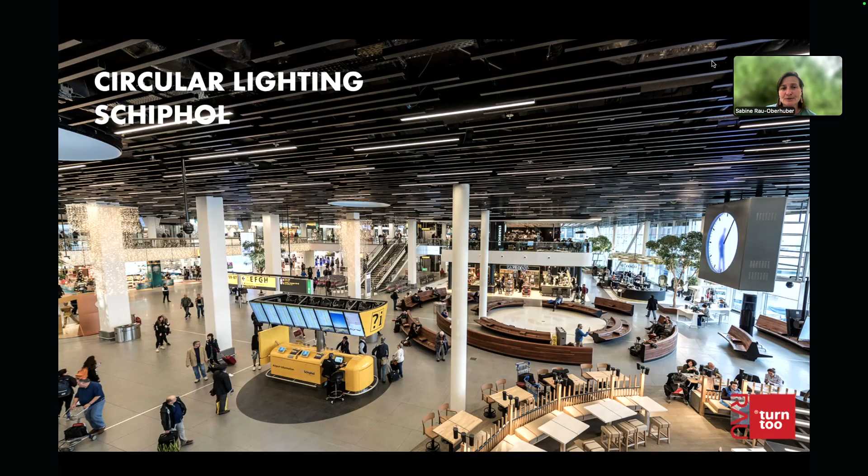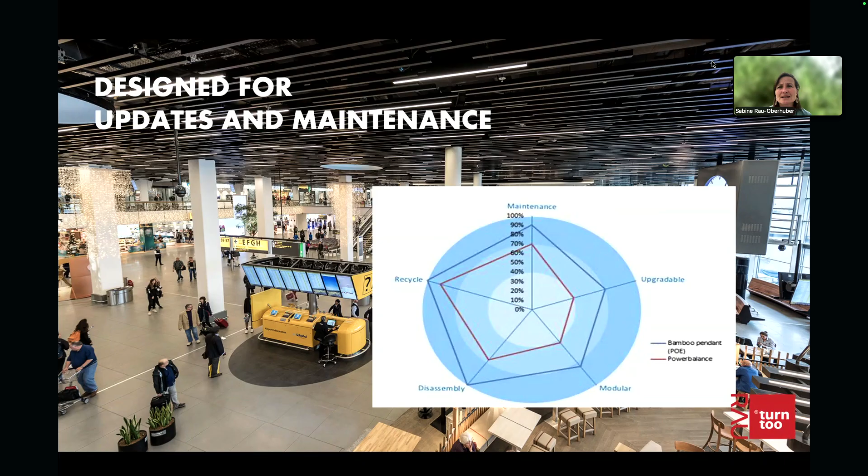So I think this is a very fundamental paradigm shift of how shifting responsibilities also shifts incentives, which we really need in order to get a different system.

The next is definitely circular design. The design principles were already also part of the solution in the circular case.

I want to share with you a couple of examples from our practice at RAU, where we started really thinking of buildings as material banks. So instead of building buildings with— sorry, I'm a little bit nervous, so bear with me.

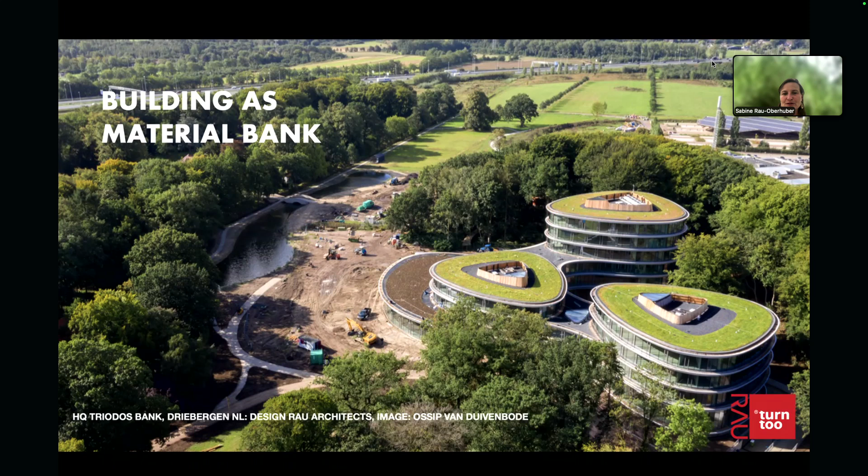So what we did with the Triodos Bank is we conceived of a building which consisted of 5 structural elements which were prefabricated, and in fact the construction of the Triodos Bank was in a way only an assembly. It was designed for reconstruction from the outset.

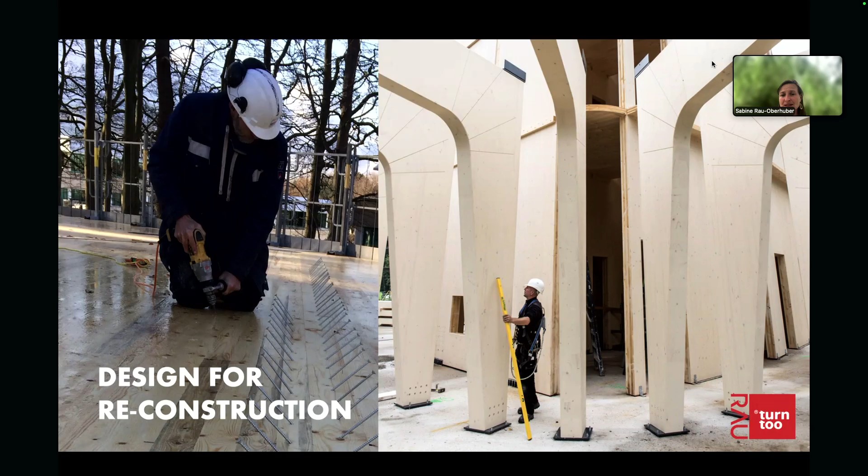And what it meant in the end was that we also could save enormously on construction time. So instead of 18 months, this building was constructed in 13 months.

And this means that circular construction is not only a way of being a more responsible architect, a more responsible citizen, but it's also really bringing economic incentives once we do it right and once we understand how to do it.

And what I think is very important about the project is that already 5 future use cycles have been imagined for this building.

And at the same time, it's not only a building which has won 8 green awards, it has also won the Office Building of the Year award. So circular building does not mean that things have to get dull or only very standardized. Via standardization, you can really create beautiful forms.

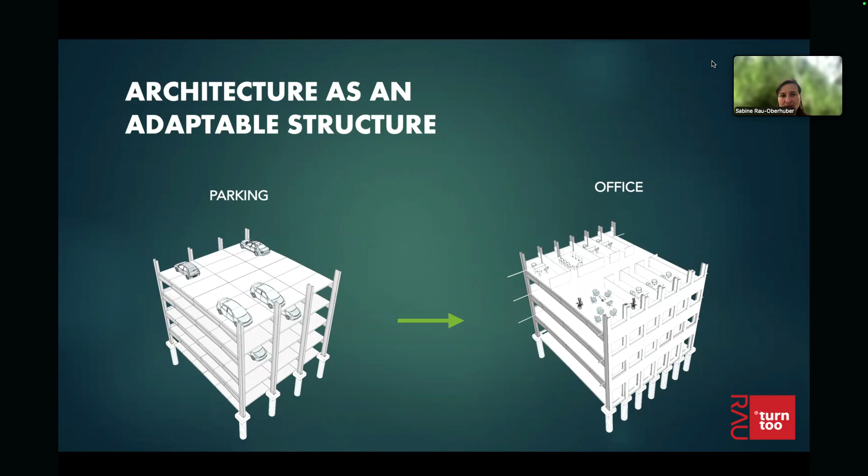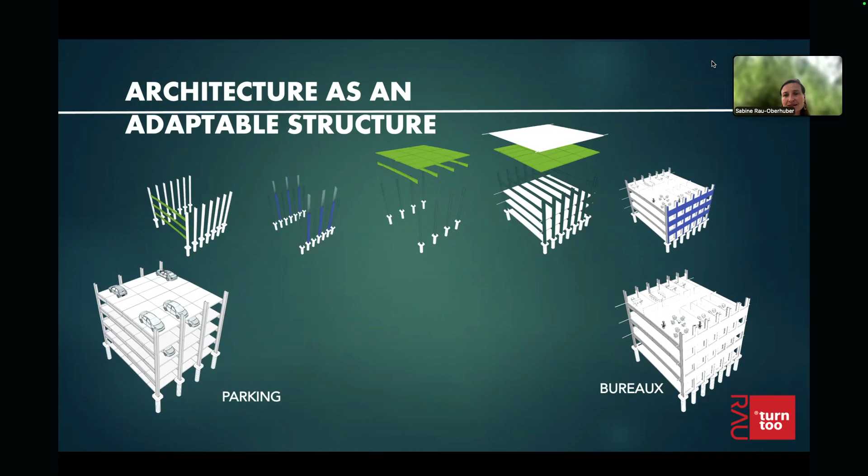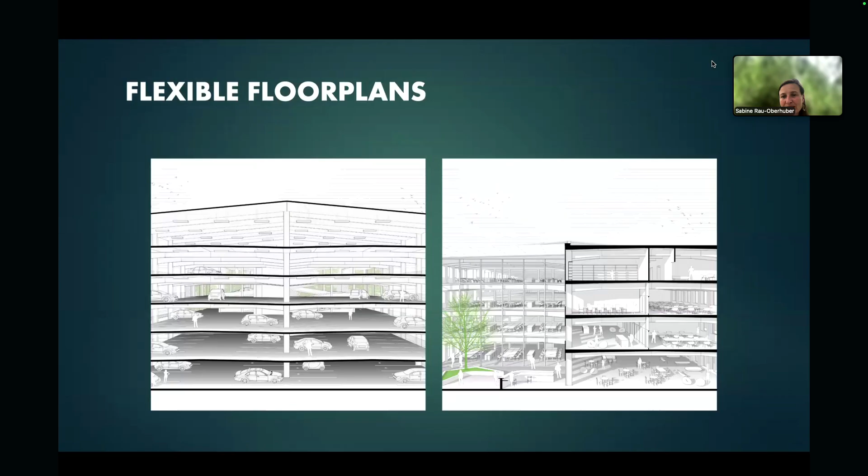So obviously, we had to think about the structural elements. The parking garage has much less beams than an office building would need. So if you adapt this building, you can adapt not only the number of beams used as structural supports, but also the layers and height of the floors. The construction enables a completely different layout of the floor plan. And this is how the structure looks up close.

Another example is the Expo in Osaka, where RAU was commissioned to design the Dutch pavilion. This structure is also designed for disassembly, and as a matter of fact, it has now been disassembled. It's in a warehouse in Osaka, waiting for its reincarnation in a second life on Awaji Island, where it will serve as a community hub on a big sustainability campus for the company Pasona.

What's also very important, and my colleague Kevin will share more about that, is that we need to enable circularity. If we have a circular building, it doesn't mean it is already being deployed circularly, because if you don't know what you have, it's really difficult to reuse it in the future. That's why we coined the phrase: waste is a material without identity.

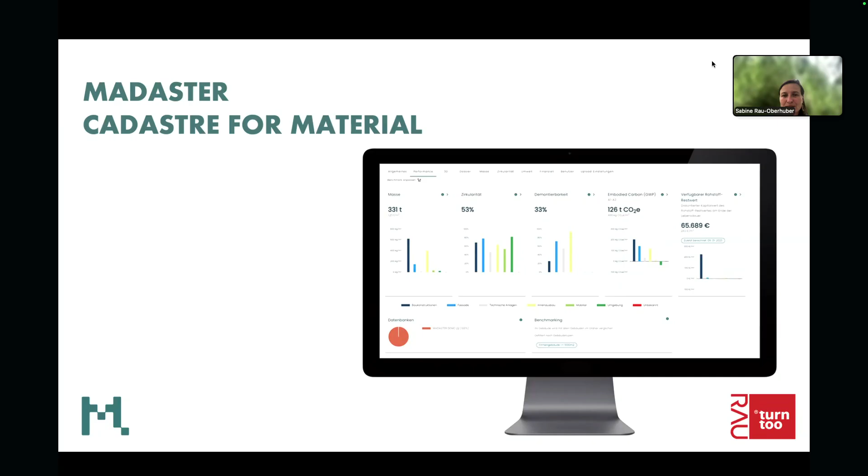What we see happening as well is more and more debate on how we should deploy materials in our societies in general. And what we see more and more is that materials are being discovered as a new asset class, so companies start to treat materials as an asset which is used and then reused again, and at the same time becomes an investment vehicle.

We think materials should be treated as a commons. So yes, we should rethink material ownership, but in a way that creates a value chain and a value-sustain chain at the same time, meaning material moves back and forth depending on its application, while also creating a financial stream to the places where these materials were mined, so we create a much more just system in our society.

This is quite a utopian view at the moment, but when we wrote our book 10 years ago, it seemed very utopian, and now I see it popping up everywhere, people starting to think about how we could create systems where the preservation of material is also driven by a financial model around its preservation.

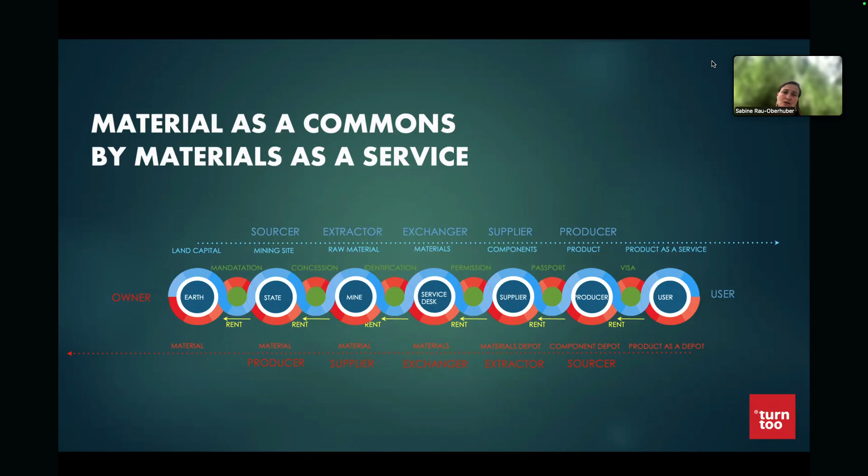Last but not least, it's also very much about mind change. I think this is actually where it starts, and it's also about our attitudes towards materials. Because materials are the fundaments of our lives, we created the Universal Declaration of Material Rights, making the UN aware that materials also have to be treated with dignity.

And I think there's nothing less dignified than being treated as waste. We see that this has become part of a larger movement where nature rights, etc., are also slowly being recognized as part of the fabric of life.

Last but not least, when you are a change maker, and I think many of you in this room are change makers, the question resides also always with me: what is my personal motivation? What makes me tick and what gives me energy?

For me personally, this is very much also about the legacy we are leaving behind for the next generation. And certainly when we're talking about materials, it's our children, grandchildren, and their children who will want to live in a world where materials are available to build their dreams.